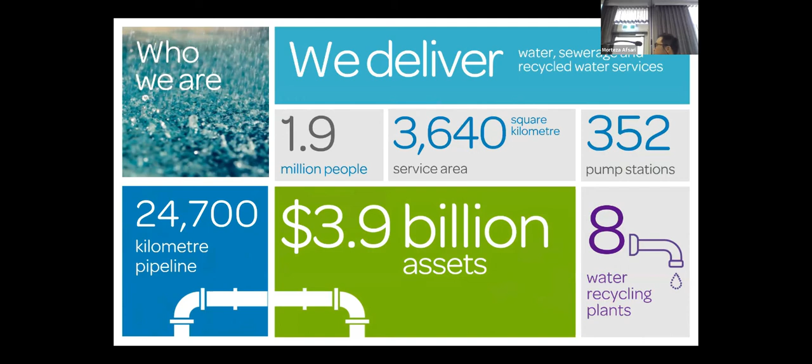We have more than 20,000 kilometers of pipe, 8 water recycling plants, more than 300 pumping stations, and the value of our assets is more than $3.9 billion.

This morning I touched a little bit on why we are so keen to be part of the NiCE talk. As I said, we have water, we have nutrients, we have other materials, and these are all significant contributors to the circular economy.

We are facing the pressures of population growth, climate change, water scarcity, and urbanization. So we have to do something now, and that's the reason we have built our research partnership with the ARC NiCE Hub.

So next, I'm going to talk about our plan. You probably all know that the NiCE Hub's work covers the whole value chain, from urine collection, urine processing, fertilizer optimization, to the end user of the fertilizers.

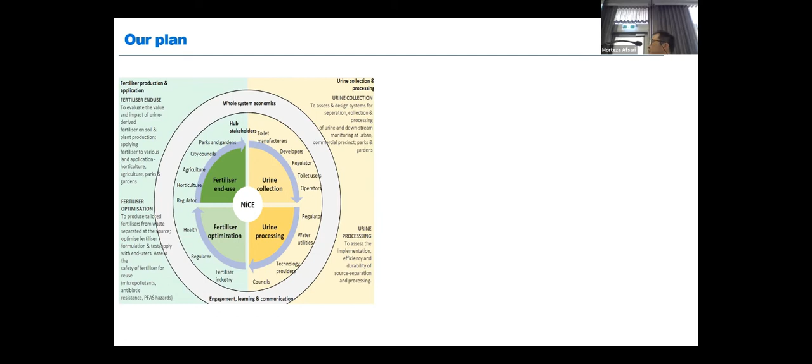The first one is about the impacts of urine separation on the downstream process. The second one is about a new process for nutrient recovery from urine. And the third one, as Professor Sean just mentioned, is about NiCE Loo, a futuristic mobile toilet for technology demonstration.

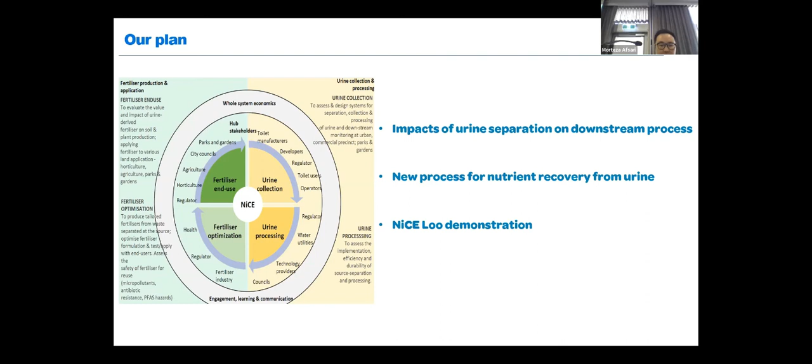So next I'm going to talk a bit more about the details of each of these projects. The first one is about the impacts of urine separation on the downstream process.

Previously there were some preliminary studies. They basically demonstrated that if we have urine diversion, then we will have less corrosion in the sewer pipes. This is obviously because the pH of urine is normally lower than 7, it's acidic, and we have a lot of salts like chloride which can corrode our pipes.

Meanwhile, urine diversion can also have positive impacts on treatment plant operation. Basically we remove the nutrients before they enter the treatment plant, we free up treatment plant capacity, and we also reduce treatment plant energy consumption.

But this is only preliminary studies. What we are going to do with researchers from the NiCE Hub is further investigate the impacts of urine diversion on downstream treatment plant operation. We are also going to investigate the microbial communities and chemical transformations within the sewer pipe.

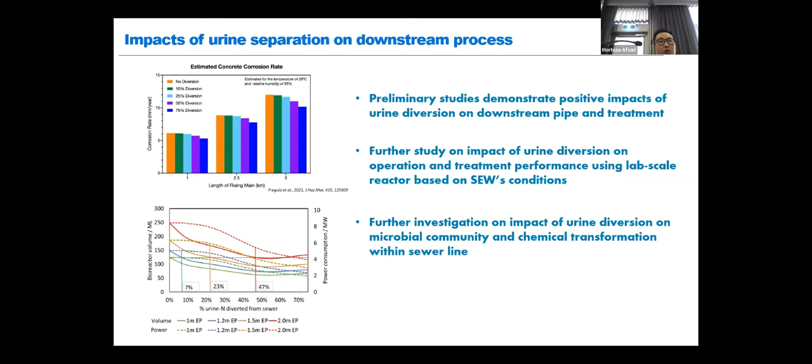So the second project is about a new process for nutrient recovery from urine. These two existing processes you already know, UrVal and U Gold, are well-known processes developed by Professor Sean and Dr. Stefano. They are either based on MBR with membrane distillation, or electrochemical processes.

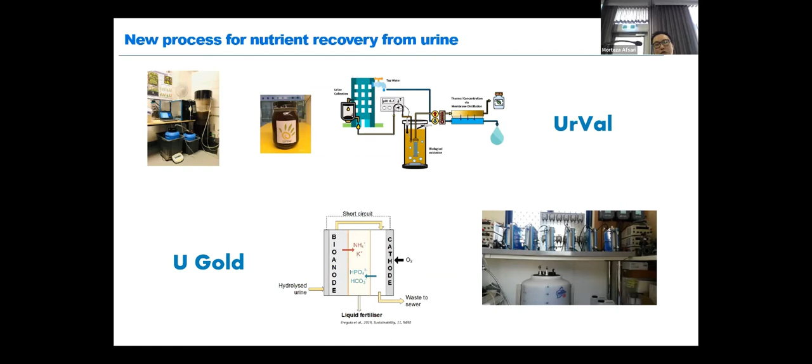We are at a very preliminary stage to develop a new process to recover nutrients from urine. This new integrated process combines reverse osmosis, RO membrane, and some pre-treatment processes like fractionation.

We all know that RO process has a lot of advantages. For example, we can get concentrated nutrients, we can also reuse and produce the permeate, and we don't need chemicals.

But we also need to control the biofouling and scaling of the membranes, so we try some new pre-treatment processes combined together to control the scaling and biofouling of the membranes.

And by the way, we haven't got a good name for the process. Maybe you can come up with some good names. Please let me know, or let our team know.

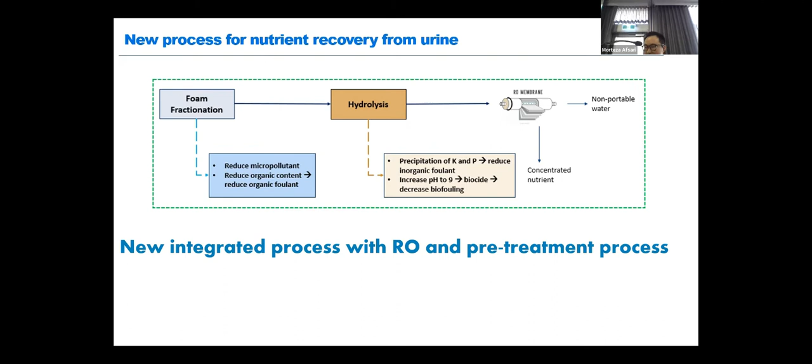So the third one is about NiCE Loo, a mobile futuristic public toilet. This public toilet combines a traditional human toilet with a living lab, which transfers human urine into liquid fertilizer. We will build this, and we can use it to support our customer engagement and community events.

We can put it, or support councils, at events like a food festival, music festival, or just place it in a hot spot or tourism spot during the hot summer.

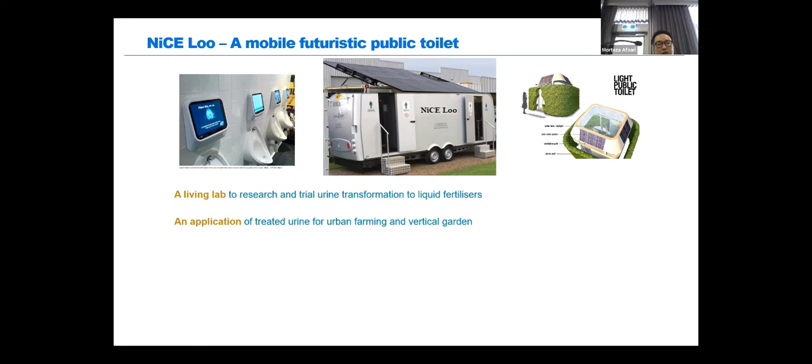So we hope this is a living lab to research and trial urine transformation to liquid fertilizers. It's an application of treated urine for urban farming and vertical gardens. It's an education center to understand customers' expectations and drive behavior change. It's a research site to investigate the decentralized urine nutrients recovery system for future scale up. It's an engagement tool to engage local councils, communities, and the agricultural or fertilizer sectors.

It will also be an exhibition center to demonstrate our commitment to the circular economy.

So I won't talk too much about the technical development of NiCE Loo, which is obviously important. I actually would like to emphasize the customer research components of this project.

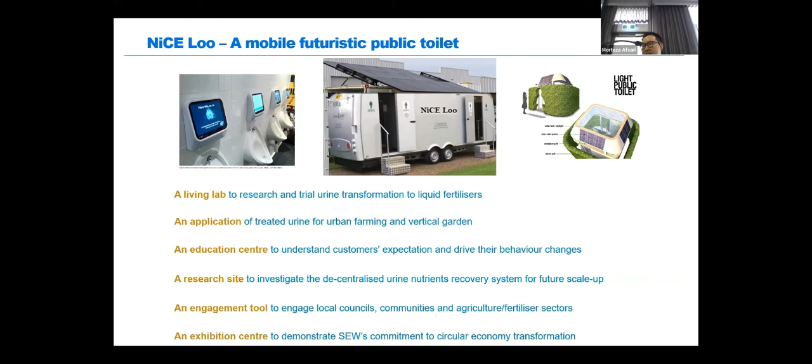So how is our community, our customer community's attitude and behavior to the circular economy? What is the best messaging and engagement strategies? How can we influence social media, and how can we promote the use of circular economy processes and materials? And can we test the willingness to pay for the future scale up of the circular economy project, such as this?

This is all what I have. Thanks for your time. Like I mentioned this morning, I'm really looking forward to unwrapping the onions of the circular economy with all of you. Thank you.

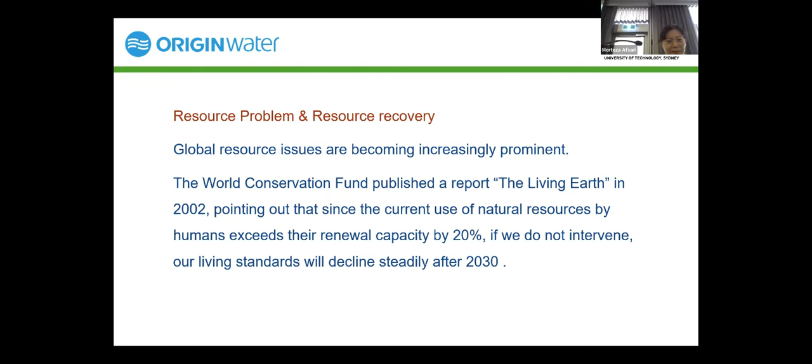Resource shortage is a global problem. Once we talk about resource problems, we think about how to recover the resources we already use. A report called the Living Planet Report points out that the natural resources used by humans exceed their renewable capacity by 20%. If we continue our activities like this without remediation, after 2030 our living standard will decline. So everybody thinks about different ways to recover resources.

As I'm coming from Origin Water, we manufacture membranes, so we focus on the application of membrane technology in water resources. Today I'm going to talk about 3 applications: one in fertilizer recovery, the second is about industry wastewater recycling, and the third, which is not very positive but still a useful way, is recovering lithium from brine or salt lakes.

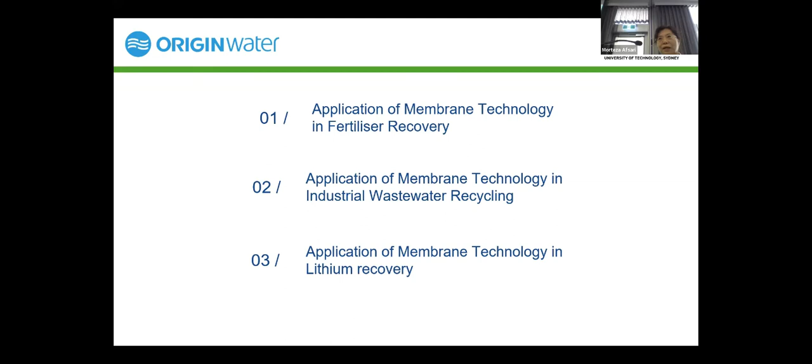This work is a collaborative project working with Professor Sean's team, so the following data was actually provided by Sean's group.

I think we're familiar with this whole process. We just try to use technology to minimize the smell during the fertilizer recovery from urine. The key structure of the unit is a membrane, MBR membrane technology.

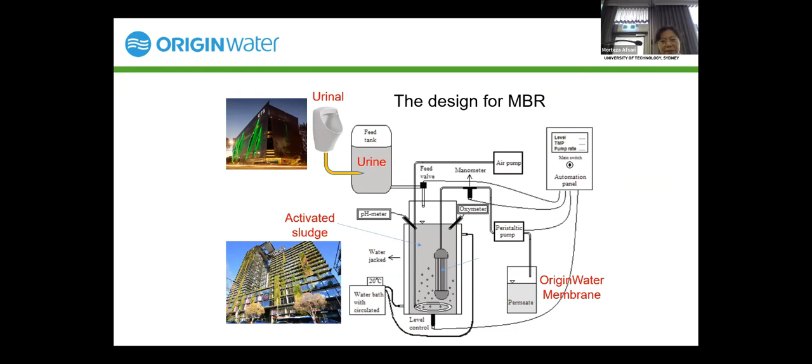We have run the unit for about 2 years, and we also have a product that's not quite in the market yet, but we already use it for the laboratory plants.

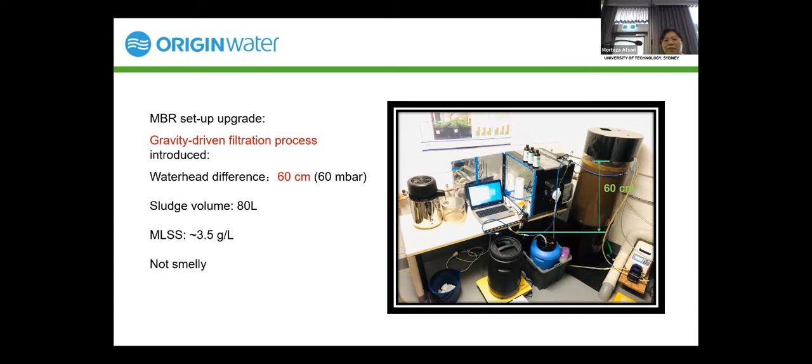In the next step, in the future, we are going to modify the whole process, just because we want to minimize any risk when using urine-recovered fertilizer. I believe we have lots of things to do, but I'm sure we can get all the results we expected.

For the next application, let's talk about industry wastewater recycling. Many industries have developed their technology but also discharge lots of wastewater to lakes or water catchments. Even though we have regulations or standards to limit the discharge of wastewater into the environment, there's still an accumulation process, so there's still wastewater or pollution being discharged into the environment.

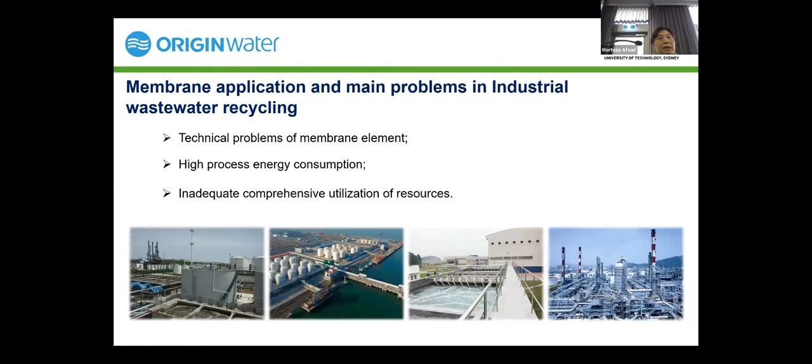When we do industrial wastewater treatment or reuse, it's difficult to control the whole process. There are so many problems when developing wastewater recycling, including technical problems and high energy consumption, along with the use of other resources. So Origin Water developed a solution with microfiltration and nanofiltration, also with an RO system, for the whole process to meet the requirements of industrial wastewater reuse.

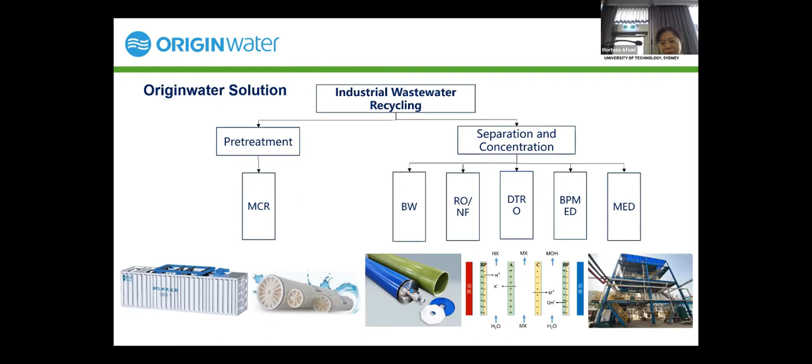The second example of wastewater recycling is to produce a byproduct during our treatment process. For example, when we recover lithium from brine to form lithium carbonate, we also need to add sodium carbonate. But normally, when we work with salt lakes, we also have some sodium carbonate in the lakes.

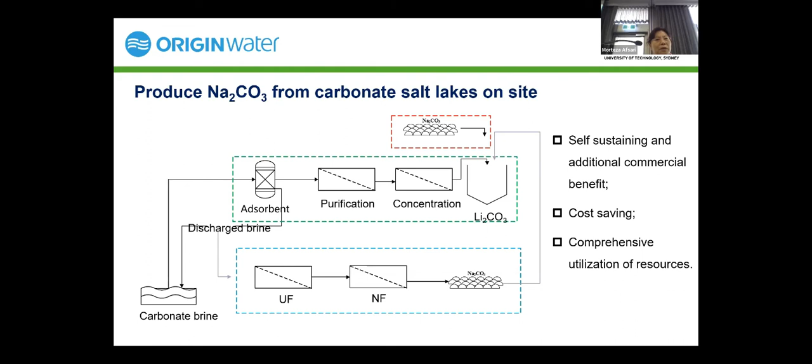So we developed a process where we do lithium recovery, while at the same time we also produce sodium carbonate. This way we can save money, and also make the whole process environmentally friendly.

The next one I'm going to talk about is the recycling process that extracts bromine and potassium from seawater. That whole process also includes membrane processes. We have the advantage of developing membranes especially for industry wastewater recycling, and we can also modify the whole process ourselves.

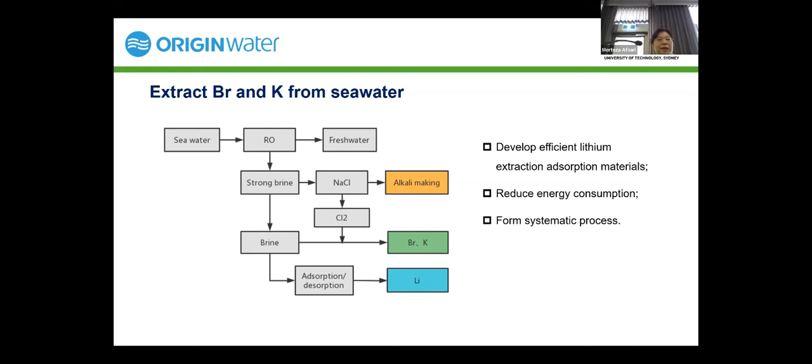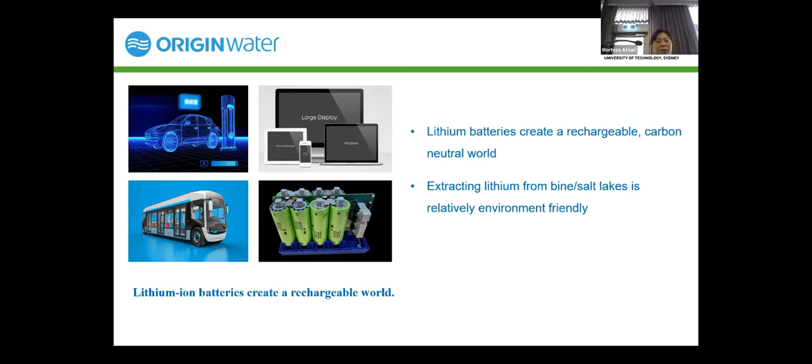The last one I'm going to talk about is lithium recovery. The previous two applications were really a positive job recycling resources from wastewater or waste, but this one, lithium recovery, isn't that positive. Still, we really need to fix this problem because we need lithium batteries for our life today. In this process, we compare lithium mining and extracting lithium from brine. We think recovering lithium from brine is more environmentally friendly, and we probably do not need to damage or affect the environment around those areas.

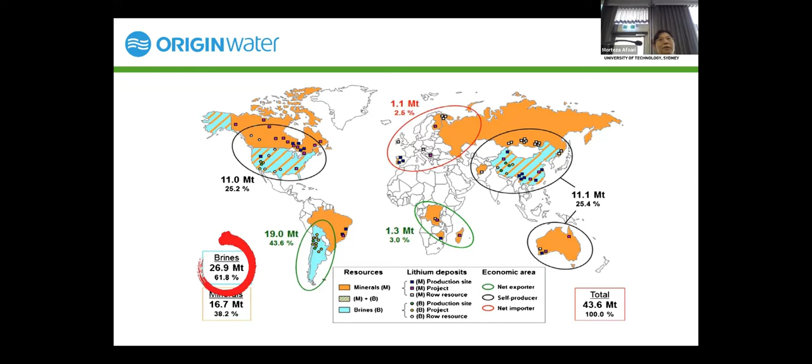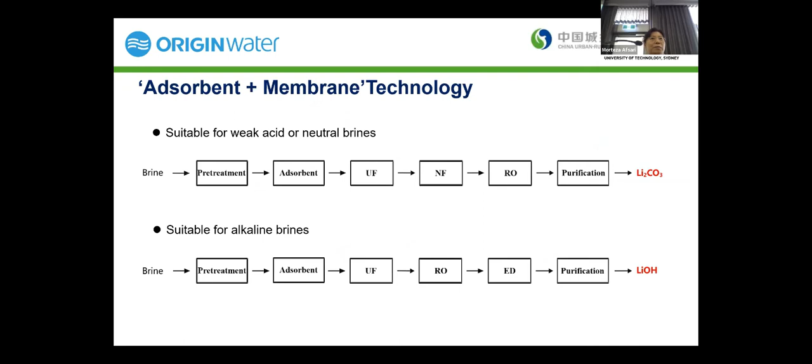So these two processes we developed are just for lithium recovery. They're slightly different, and they also have different products. This is actually a nanofiltration unit we developed especially for lithium recovery.

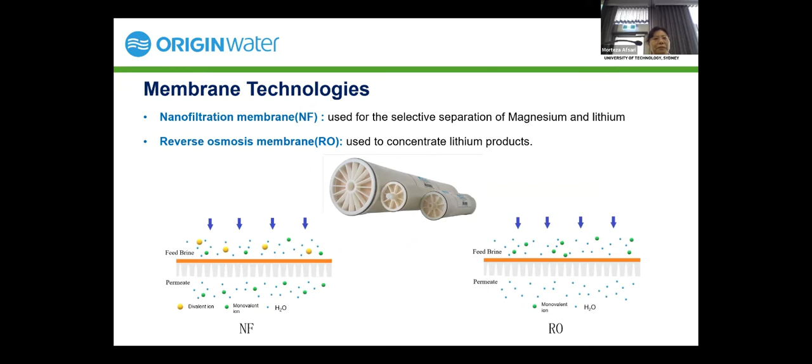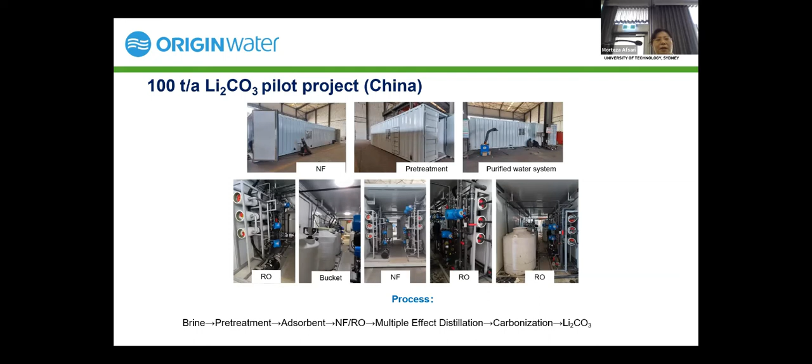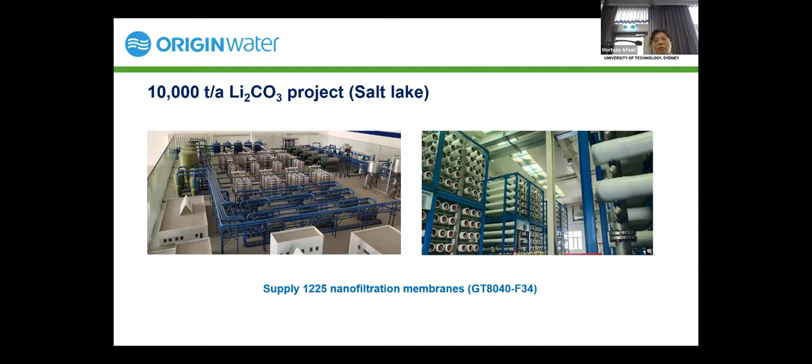Here's the case study, a real engineering project we developed in China. It's not a big one, but it covers all the technologies we developed related to membrane technology. And here's the larger lithium carbonate project that extracts lithium from a salt lake, where we developed the adsorbent, membrane, and final product.

That's all the information I'm going to share with everybody. Thank you to my team and also to Professor Sheng's team for providing all the data in this presentation. Thank you for your attention, and thank you for your time.

Thank you, Jim. Thank you, Dave. Right. Yeah, we have a couple of questions.

Thank you, Doctor, very interesting. I'd like to see the work going on in industry and application. Fantastic, just interested about the lithium recovery. You talked about batteries, but is the process taking feed from battery waste, or salt lake, or both maybe? Do you do a similar process for each?

We only do extracting lithium from brine and lakes. Do you think battery waste is going to be a big contribution, or do we still need mostly raw supply of lithium? I think the IEA predicts something like 10% of lithium supply comes from recycling, but maybe it could be more. Not sure what your opinion is on the percentage battery recycling contributes to the lithium supply.

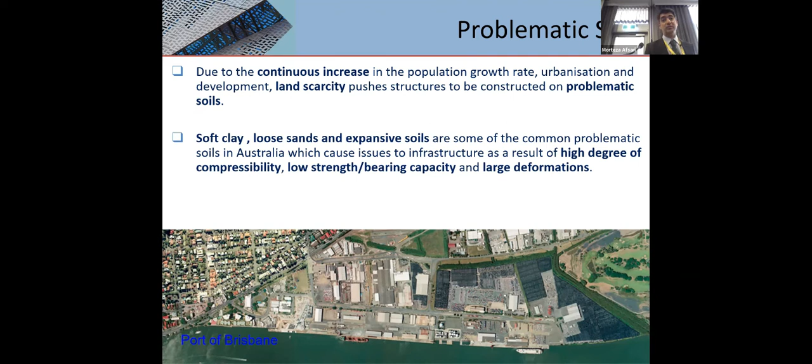For example, for port construction, the picture you can see here is a land reclamation that needed a lot of ground improvement, which is quite expensive and can be energy intensive in terms of use of cement. Soft clays are those muddy, marshy sort of material that, if you get it under your infrastructure, you end up getting a fair bit of cracks on the road, or even your railway may suffer damage.

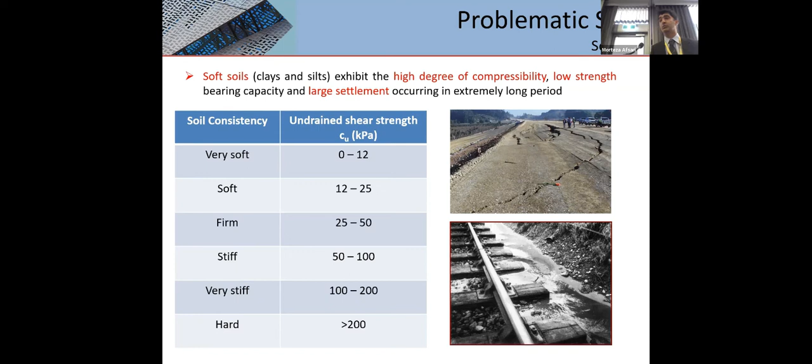Generally, if their strength is low, in terms of kPa, kilopascals, less than 25 kPa, they are not good. You need to do something with them to avoid the problems you see there.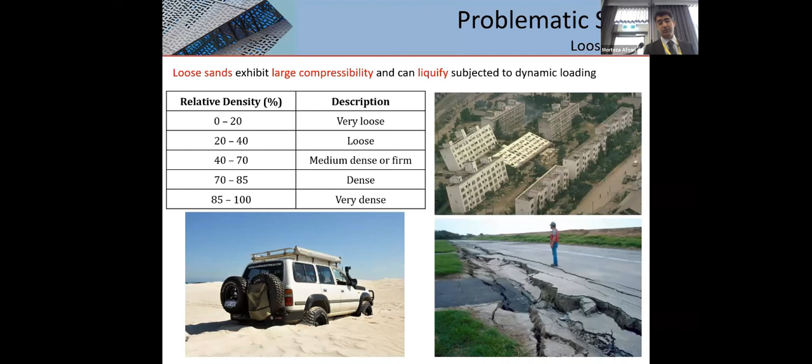The other problem we have is expansive soils. Some soils, when you add water, they expand. Many cracks that you see in residential buildings, 1 or 2 story buildings, are because of that. It's just the chemistry of the clay - water is a polar sort of molecule that attaches to the surface of the clay with negative charge and keeps expanding.

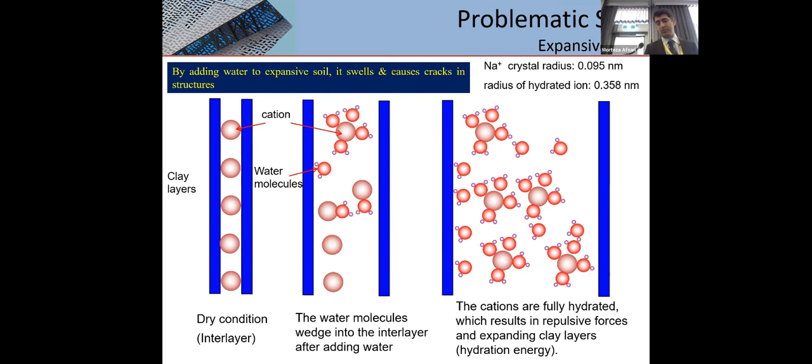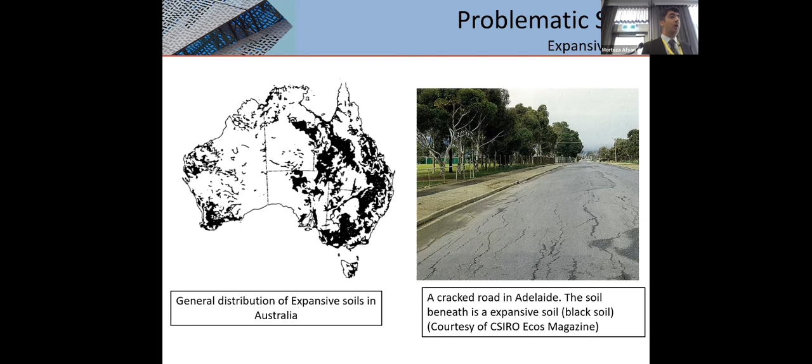So these are problems that we have. In terms of expansive soils, it is quite common to find on the East Coast here in Australia, and the picture on the right shows that if you have this type of clay under the road and it's not treated, you will end up getting these cracks and potholes and so on that all of us are experiencing these days, particularly after flood.

There are current techniques used to treat those sorts of soils that I mentioned. Some of the most common ones involve the use of chemical binders. The most popular one is addition of cement, which you can see on the left-hand side here - there is a truck going, spraying the cement on the surface, or it might be lime, and then there is a roller coming, compacting this material, and then you leave it there, similar to concrete. It sets and becomes strong, and you can build your road on top.

Or you may like to, if the problem is deeper, use techniques such as the pictures on the right. We have deep cement mixing, where you inject cement powder or cement slurry, mix it in situ with the soil, and create a strong profile, and then build your structure on top.

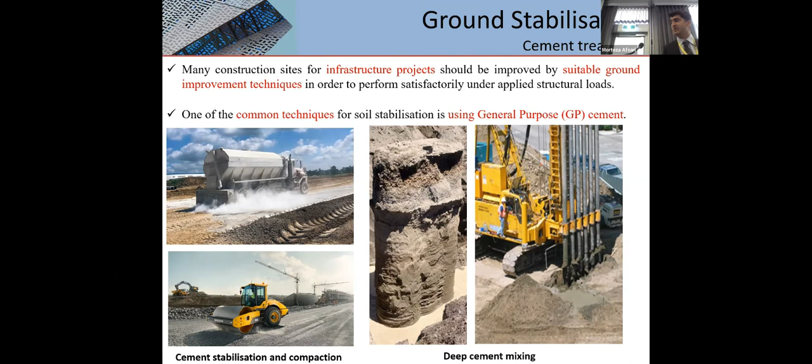Cement is one of the common items we use there as a binder. However, we know there are significant challenges in terms of cement usage and production. It creates a fair bit of carbon dioxide in the production of cement. To be precise, 8% of the world's carbon dioxide emissions come from cement production alone. There are a lot of other challenges in the construction industry, but this is just from cement production.

So there is great motivation to minimize usage of cement, and therefore its production, in the traditional fashion. If you wonder how it works, basically cement goes through a kiln system, and then under high temperatures, around 1,400 degrees, you create the cement, and CO2 is generated there. So it's energy intensive as well in terms of CO2 production.

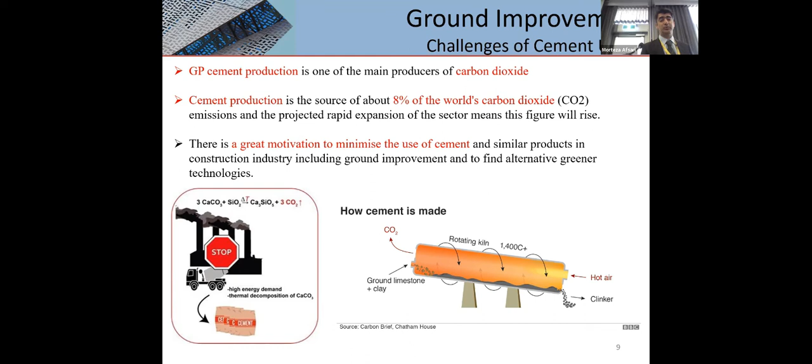Our proposal is that we would like to use those problematic materials we have, including Bringelly shale that we have here at the new airport in Aerotropolis in Western Sydney. We would like to add treated urine, and the current proposal also shows you can add a bacteria called urease, which then creates a binder in the soil without actually having cement addition.

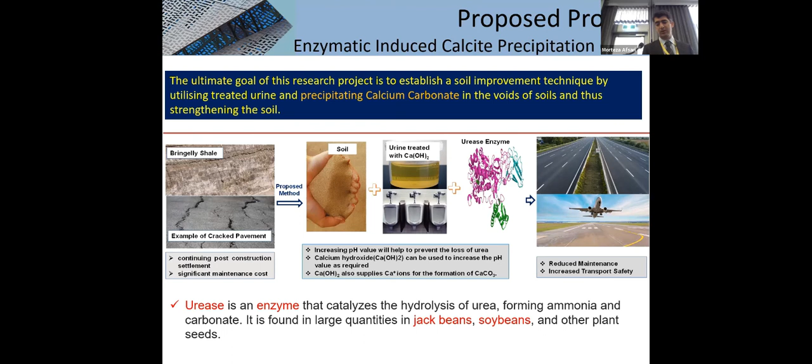Urease is an enzyme that acts as a catalyst, facilitating the creation of carbonates. This is the chemical mechanism involved, though I'm a civil engineer, not a chemist. Urea plus water, in the presence of urease, which is a bacteria or enzyme, creates carbonates, and byproducts which are not nice in the construction industry, including ammonia and ammonium.

Then we add calcium to this product, which creates calcium carbonate that precipitates inside the soil and creates natural cementation. Many of the rocks we have underground, which are strong, naturally have this calcium carbonate precipitated over millions of years. That's why they are strong. Here I can see there is great potential.

For the source of calcium we need to add to the urine, there are a few positive things. If we lose urea at low pH, unfortunately we cannot use it. So when we add calcium hydroxide, it elevates the pH. Therefore, as you can see on this graph, the loss of urea would be minimized.

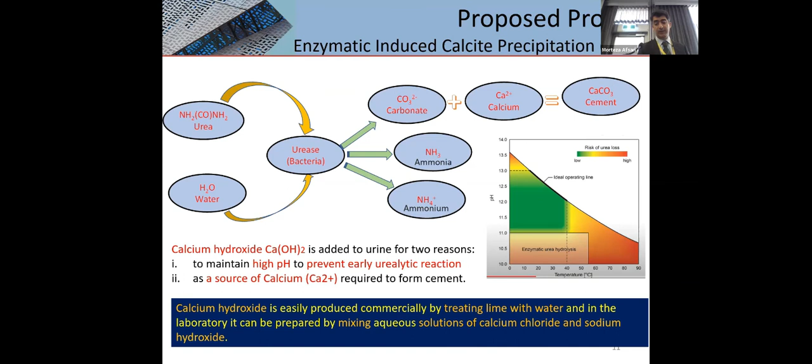So we can utilize it, and at the same time it creates the source of binder to form calcium carbonate. Our idea at the moment is creating this through lime mixed with water, or in the lab with a solution of calcium chloride and sodium hydroxide. So that's how it looks.

There will be a fair bit of mechanical testing in addition to chemical testing. We're going to test the Bringelly shale and break it down to small particles. We're going to test it on loose sand as well, and expansive soil.

We're going to compare this treated urine with urease against addition of normal Portland cement, or general purpose cement as we call it here in Australia, and lime stabilization, to see how good this treatment is compared to existing practices in the industry.

For the tests, again, most of you are probably not civil engineers, but we will create samples and then crush them to measure their strength under different conditions required by the standards for road construction. We will also do leachate testing to make sure what flows through the groundwater doesn't create anything unacceptable. Permeability and so on will all be considerations for road and railway construction as well.

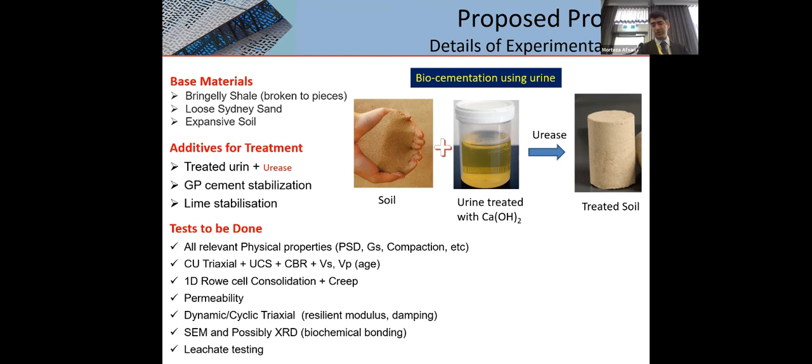So some ideas to address the challenges of the byproduct of ammonia that we have. Some of the research we've done shows that natural zeolite can be added to remove the ammonia. I'd like to learn from the members of the hub more on this.

We can also use PAA to immobilize ammonia. It's not removing it, but it just stays there in the soil. We're also going to try normal drying on site to see how it works. Obviously that releases ammonia, which is a problem, but we're going to look at it. Another proposal is that we cover the surface of the ground using a membrane to control this ammonia. It might be used for hydrogen generation and so on.

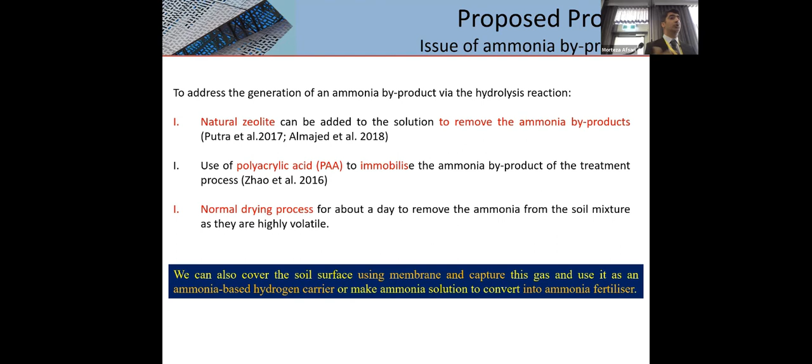Remember the scale of the work we're talking about here is improving the ground for kilometers, 30 or 40 kilometers of road. So the scale is significant, and we've done just some basic calculations here.

There are a lot of benefits in terms of replacing general purpose cement and reducing the carbon footprint. In some developing or underdeveloped countries where Australian companies operate, such as Pacific Islands, they don't have a chance of having cement even, but I'm sure they have a chance of having urine there. So it seems possible even to help there, and we need to improve the environmental image of the construction industry and move towards sustainable buildings.

As the last slide, I show we have 5.3 million people in Sydney, assuming each person creates 1 liter of urine per day. We're generating 5.3 million liters per day just in Sydney, and this is enough to stabilize the ground for 30 kilometers of road, 2 lanes, per day of production. Although this is a competing use, I guess you'd like to use it for fertilizer, but we have some use here as well.

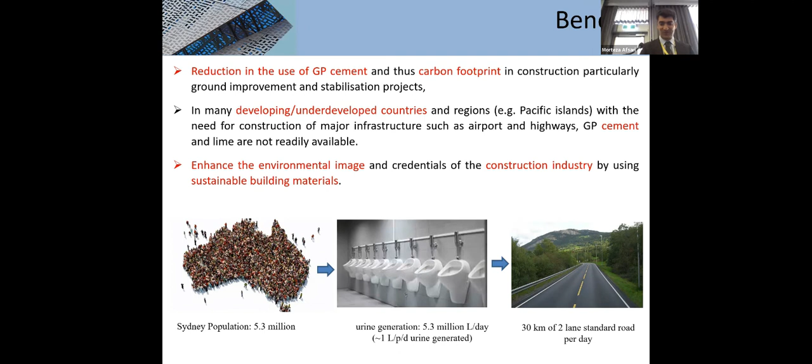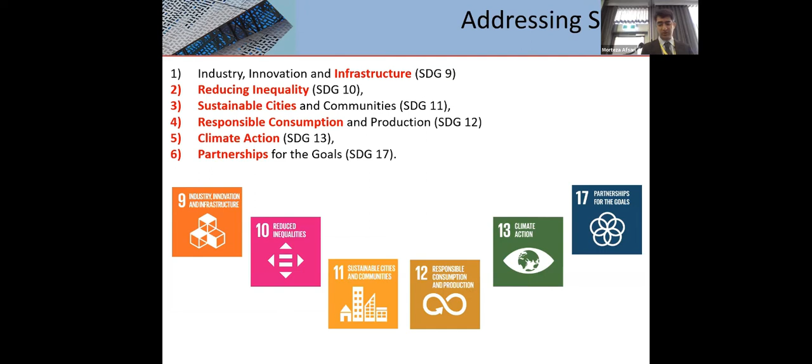This addresses quite a number of SDGs, including industry, innovation and infrastructure, reducing inequality, sustainable cities and communities, and so on. Partnership opportunities, some of them common with fertilizer, and some opportunities for collaboration.

Another interesting thing I didn't get a chance to discuss with Sean last night while putting this together: adding this material or product to the soil could increase its water retention, which is good for drought applications in the agricultural field. On that note, thank you, and I appreciate my co-CI, Professor Kapos, who is also here. Thank you, Mandel.